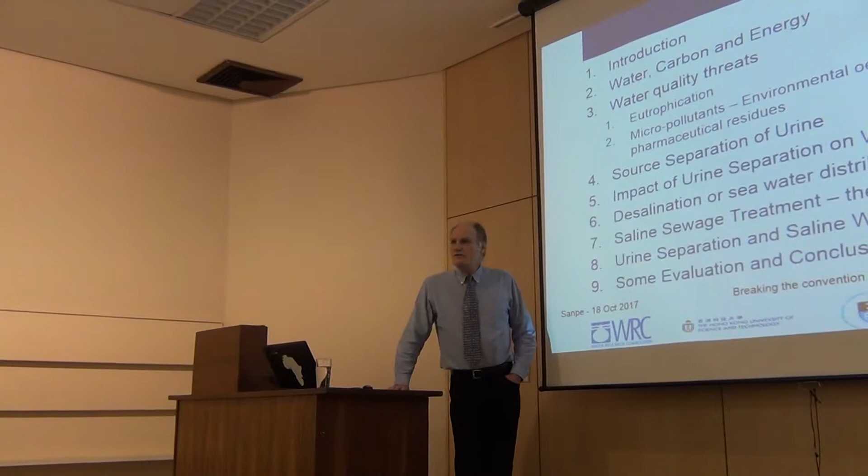So wastewater treatment started 100 years ago mainly to protect human health, and that's changed over the years. So now it's mostly about protecting the environment and human health, and that's basically broadly what I'm going to be talking about.

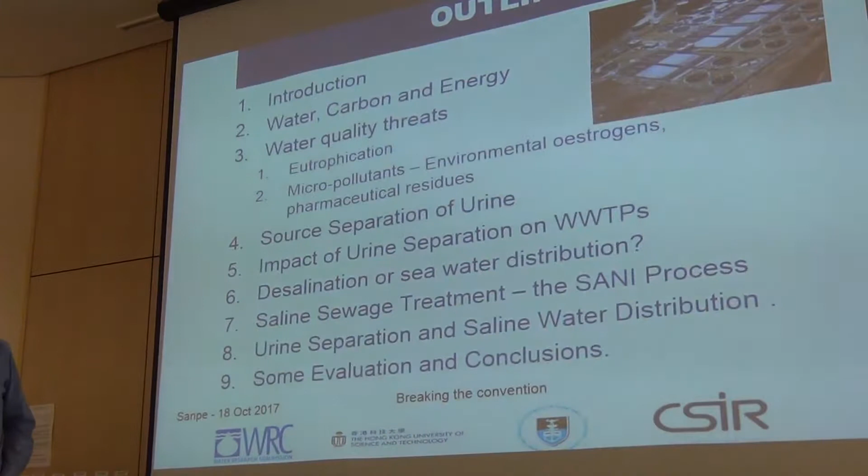So here is an outline: short introduction, the issues around water, carbon because of our climate change, and energy consumption, which of course has a lot to do with carbon, water quality threats, the eutrophication problem that we've had for many years in South Africa, an emerging problem, micropollutants, especially environmental estrogens, and then pharmaceutical residues.

I'm going to be talking about urine separation and how that changes the characteristics of wastewater and simplifies wastewater treatment. If we did manage to do urine separation, how would that impact our current infrastructure of sewage treatment plants? Then should we be doing desalination or seawater distribution? I'm going to throw out some ideas about that.

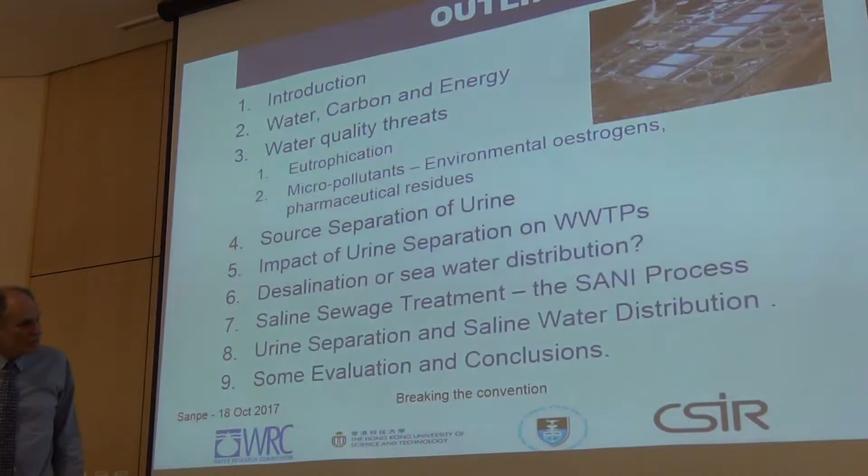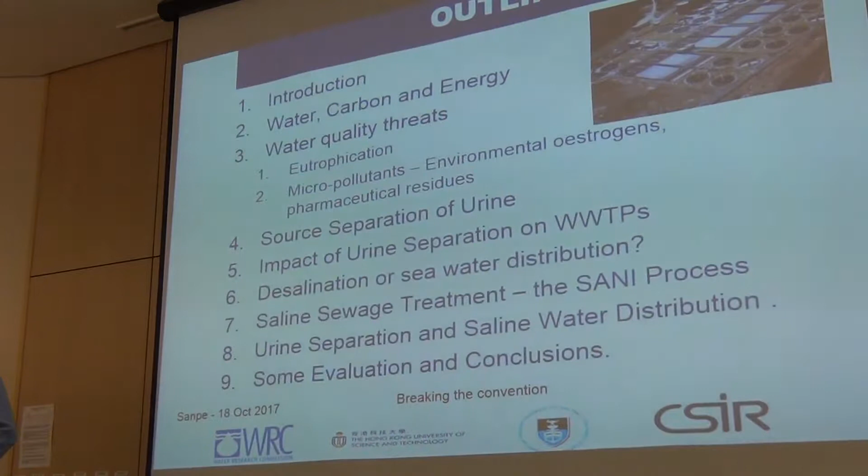Issues around saline sewage treatment, if we were to flush toilets with seawater, and the consequences of that. Urine separation and saline water distribution, and then some evaluation and conclusions. This is ongoing work, so we don't have all the answers yet, but there are some ideas here that are finding purchase in Hong Kong, which is setting itself up as a kind of a city of the future in

Asia. Alright, so wastewater treatment originated at the end of the 19th century to reduce waterborne diseases. We all know what London was like at around 1860, 1870. Cholera and dysentery were rife, people were dying of typhoid. But over the 100 years or so, we now treat wastewater to protect the environment as well as human health.

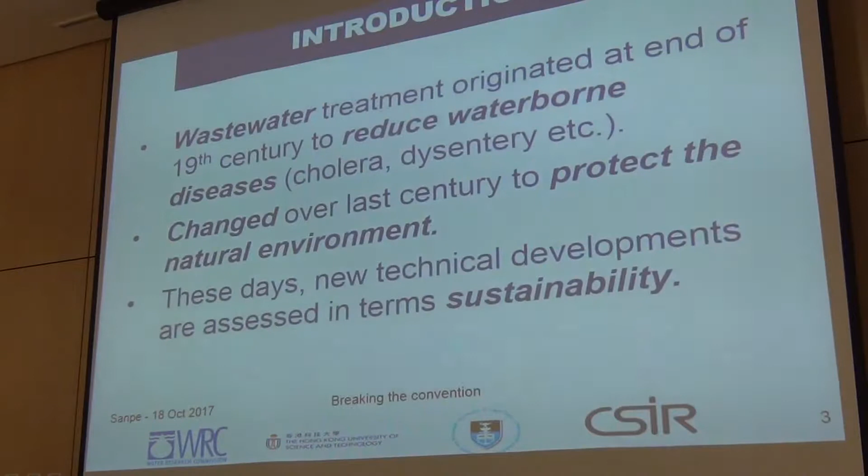But a third dimension has been added, and that's this word sustainability. So we want to try and do this wastewater treatment by consuming as few resources as possible, like energy, and emit as little carbon as possible, nitrous oxide and these other strong greenhouse gases, as few of those as possible. Sustainability, what does it mean?

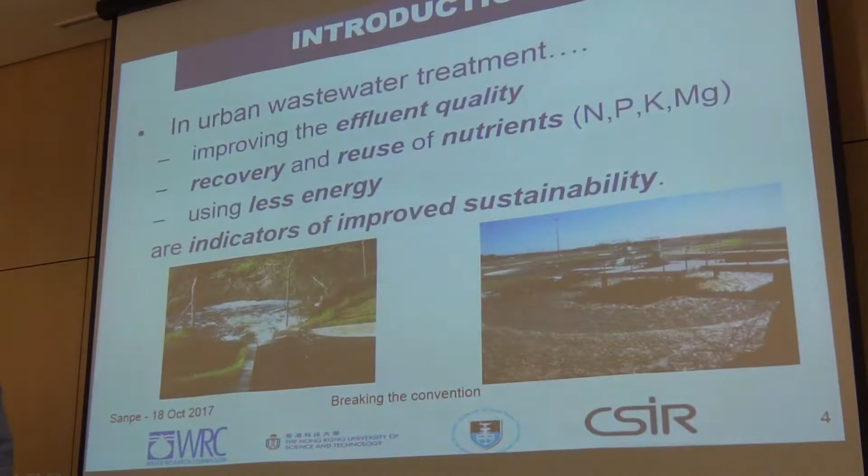I'm going to interpret it as meaning that we're improving the effluent quality of the water, the product that the sewage treatment plant is producing. We're going to recover and reuse some of the nutrients, in particular phosphorus, potassium, and magnesium. And we're going to do all this hopefully using less energy, which has to be brought in from outside. And these we will use as indicators of improved sustainability. I have no other way of knowing how to define it.

Now, the issue of energy in wastewater treatment is a controversial one, and these two authors from Vienna Institute of Technology, Svardal and Kroiss, stated it very succinctly. They say the energy that's available in the wastewater itself, that is the temperature of the water and the organics that we or industry emit into the water, is only some 0.02 kilowatts per person. That's 20 watts per person. That's the maximum that you can extract.

But the total power consumption that each of us has, connected to the grid, is in the order of 5 to 10 kilowatts per person. And that's not just what your meter reads at your house, that's the factories that make the clothes and everything, food production. And it's not a difficult number to get to, because we know how much Eskom produces, and you just divide it by the population of South Africa and you get the power consumption per person.

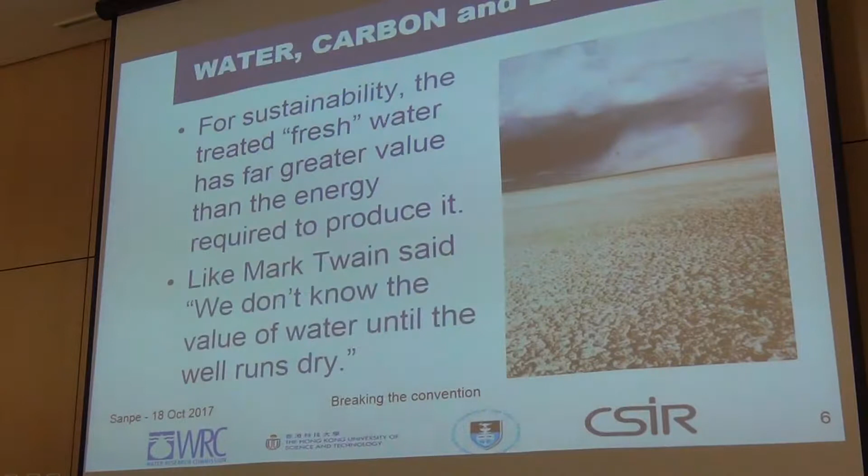So recovering energy from wastewater is never going to solve the energy problem. That's the bottom line. The water that is produced by the wastewater treatment plant is far more valuable than the energy or the carbon and nitrous oxides that we might produce in the process of recovering that water. So for sustainability, the treated fresh water has far greater value than the energy required to produce it. Like Mark Twain said, and we're beginning to discover in Cape Town, we don't know the value of water until the well runs dry. Our well is running dry.

Now, one of the greenhouse gases emitted by wastewater treatment plants, not the only one and not the worst one, is carbon dioxide. I just want to put it into perspective so that you understand the quantity of energy used in wastewater treatment by referring it to the amount of carbon produced. Every person connected to a sewage treatment plant results in about 20 grams of carbon as carbon dioxide being emitted from the plant. This is 50% of the CO2 that would be produced by the coal burning power station to generate the electricity used in treating that water. So the carbon from the organics is only half of the carbon generated at the power station for the electricity consumed at the treatment plant.

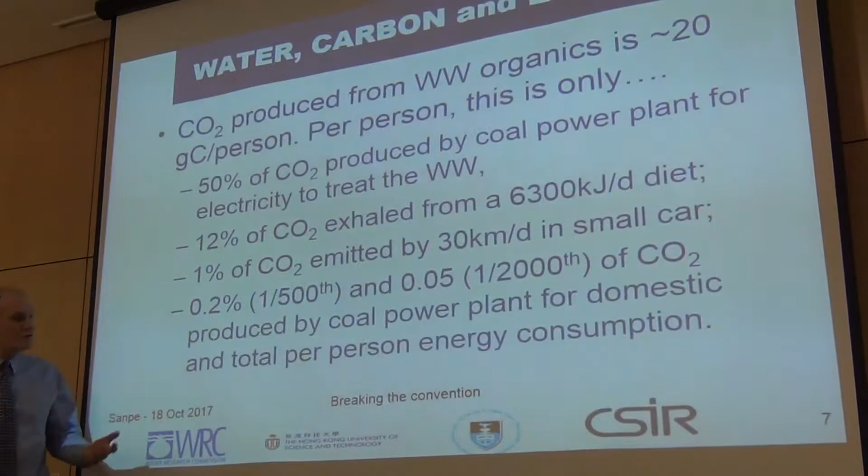And if we go down to how much energy we consume in a domestic situation and in total, we can see these percentages get very tiny: 0.2% and 0.05%, 1/2000th. So the energy and carbon at the wastewater treatment plant is actually not the issue. If we want to look after the planet, there are other places we need to go to address the problem. We don't have to go to the treatment plant. The water is more valuable.

Now, I'm not saying that we must be profligate in consumption of energy at a sewage treatment plant. No, minimizing the energy requirements of wastewater treatment plants is good. But the priority is far lower than human and environmental health, which are both closely related to surface water quality and quantity. So human and environmental health requires fresh water quality and quantity conservation. We therefore have to reduce eutrophication and salination. Salination means the acid mine drainage that's discharging into rivers from spent mines or even operating mines.

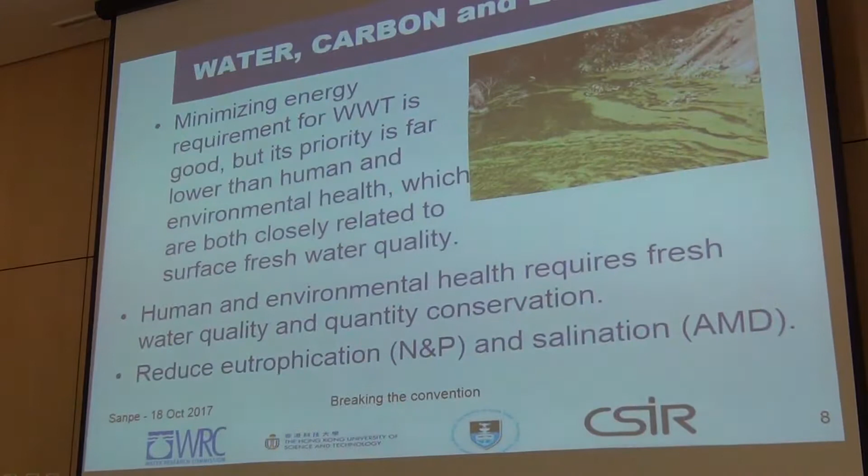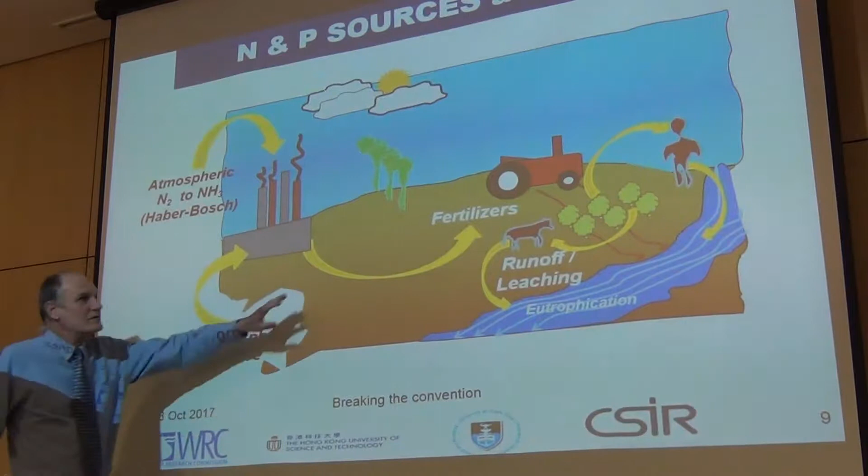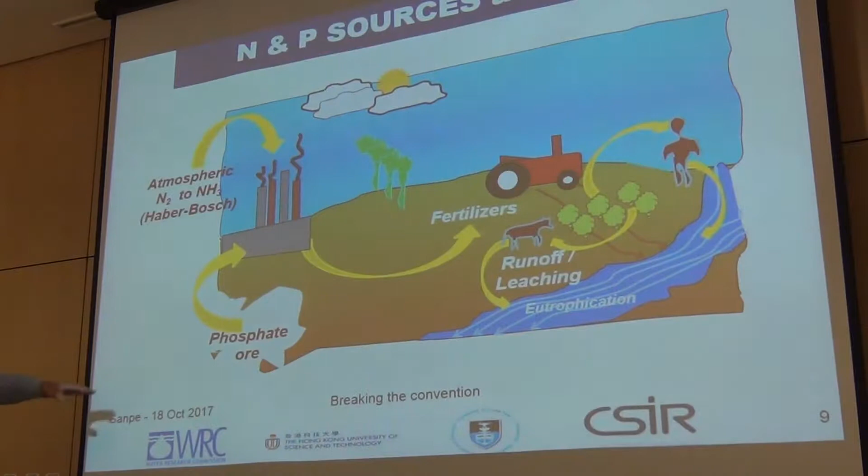Also, phosphate is mined, and it is a limited resource. There are predictions that we might run out by 2050, and where we're going to get phosphorus from then, we don't know, but agriculture needs it.

So phosphorus recovery becomes an important issue. So technologies have been developed to remove biologically nitrogen and phosphorus. We've played a fairly prominent role in South Africa internationally in achieving that through courageous municipalities and inventive universities.

And also sulfate from acid mine drainage is receiving increasing attention. So this is the sort of brown water that you see that decants in low areas from mining areas. Witwatersrand below the city is like Swiss cheese. You can't tell whose mine water is decanting where. It moves from the east and decants in the west because that's the lowest part of the Swiss cheese. And no one can accept responsibility for it because no one knows whose it is.

And yeah, it becomes an issue of what I call privatizing the gains and socializing the losses. The miners have been there and they've made their profits, and now your and my taxes have to go in there and pay for getting it fixed up.

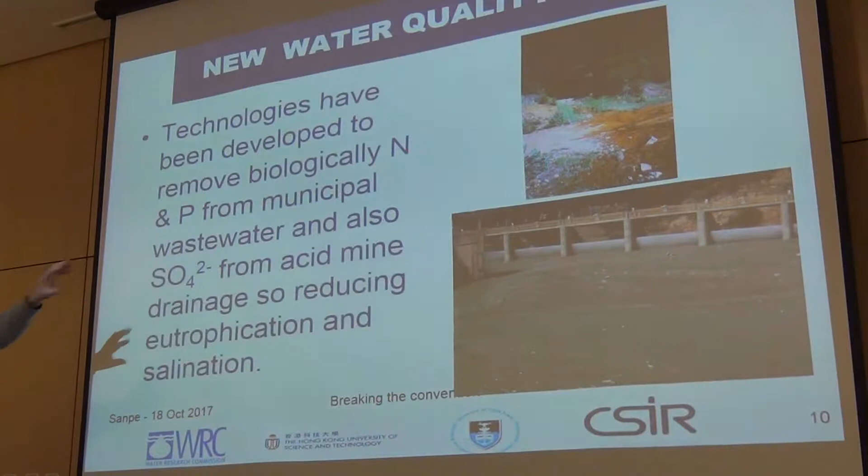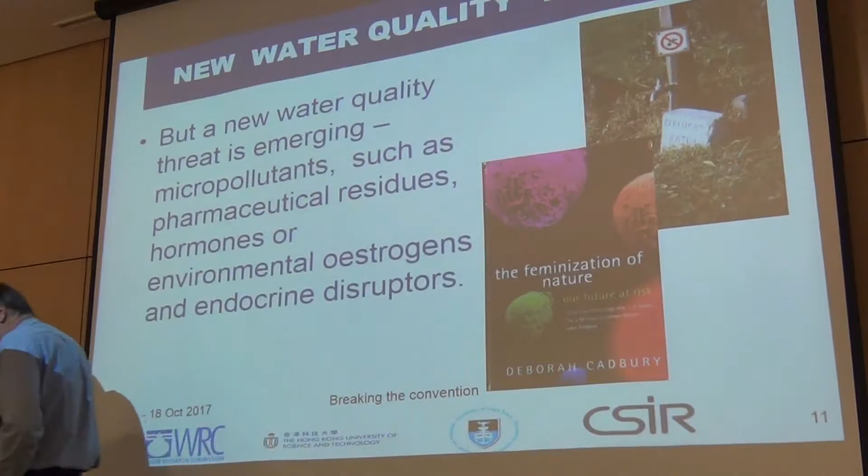Okay, so this is an issue that we're facing here in South Africa. But there is another very important issue that's emerging, and this is the one of the micropollutants. There was a fascinating book that was written in 1998. It's nearly 20 years old. Deborah Cadbury spoke of the feminization of nature, where environmental estrogens and endocrine disruptors, which come from medical residues, are changing the gender of

crocodiles, for example. Now, when crocodiles lay a nest of eggs, the temperature of incubation dictates the gender of the crocodile. So if a leguan or something wants eggs for breakfast, digs out the crocodile eggs and eats the top ones, they're the males. The females stay in the bottom of the nest where it's colder.

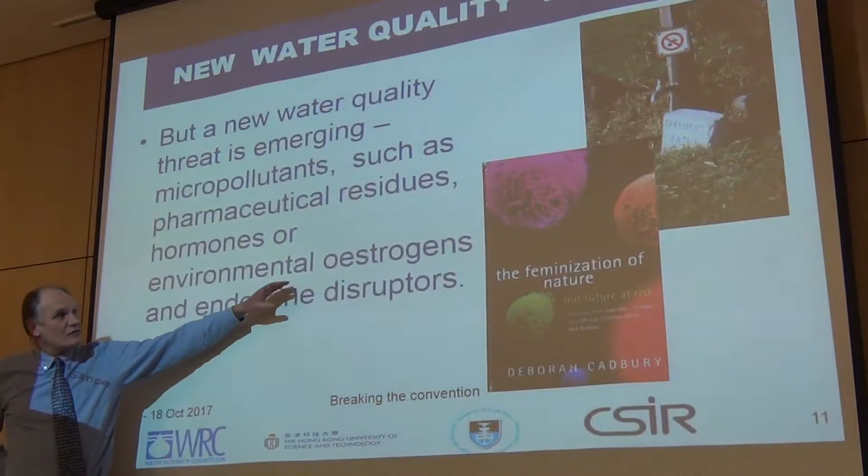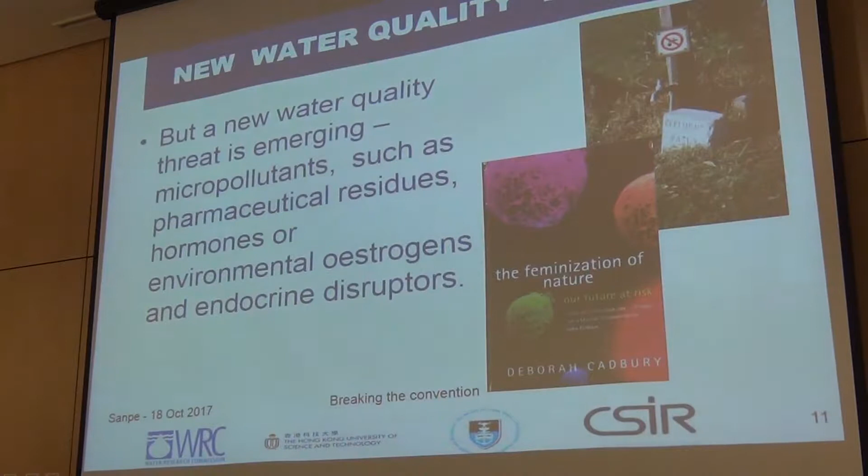They have done work on, and she describes these things, turtles, crocodiles, where they paint these endocrine disruptors that are detectable in the environment in and around the eggs, and they all hatch female. Trout hatcheries above and below sewage treatment plants: all the trout that hatch above the discharge of the sewage treatment plant effluent in the river are a mixture of males and females. Downstream are all females. This is a serious issue that we need to address.

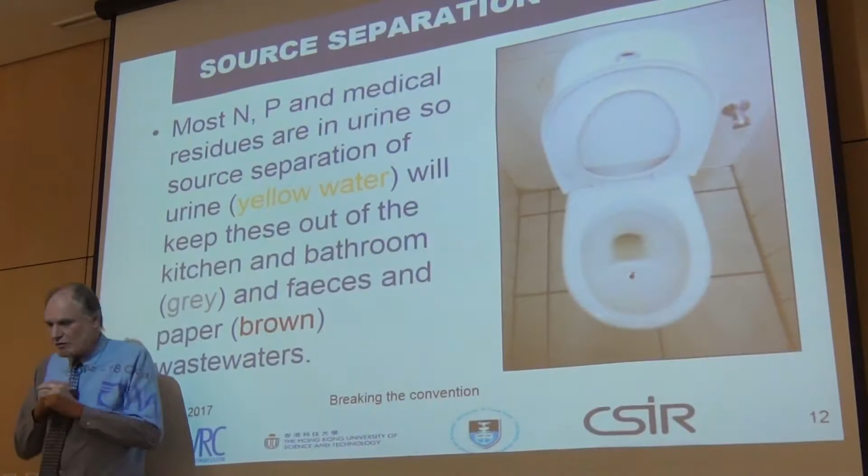One of the issues that can address this is urine separation. And there's quite a lot of research out there which shows that many of these endocrine disruptors and environmental estrogens are emitted via the urine. At least 2/3 of them come out the urine. The other third or so, depending on the type of medication, come out via the feces.

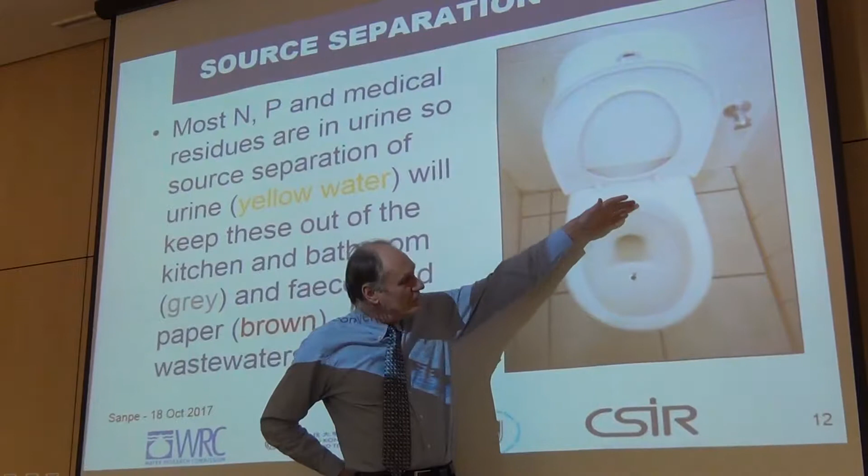So if we installed urine separation toilets, I think many of you would probably have seen them, it's got a little bowl in the front for urine and the feces go into the back. And the two streams are kept separate. If we did that, then everything that's contained in the yellow water will not be part of what we then would call the brown water. And that makes a significant difference. And the differences are as follows.

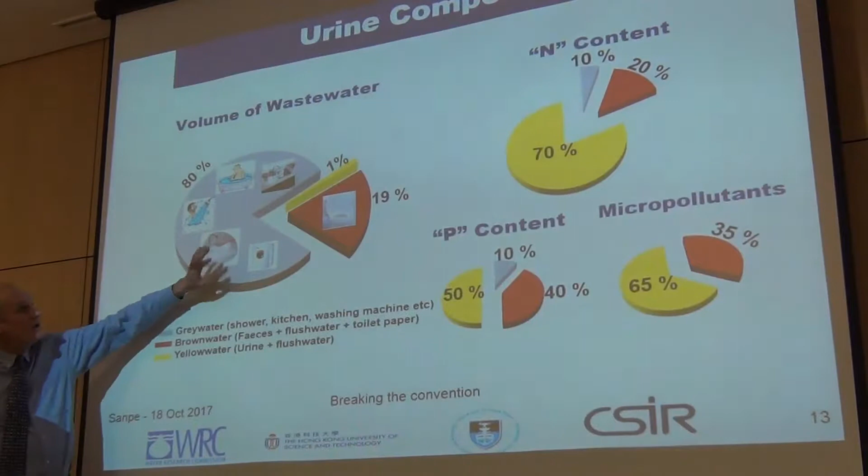So with regard to the volume of the water, this is grey water, and the red is brown water, the feces from toilet flushing, and yellow is the actual urine volume with a small amount of flushing volume. So you can see that the volume of urine that you would collect is very little. It's only 1% of the total water that would be produced.

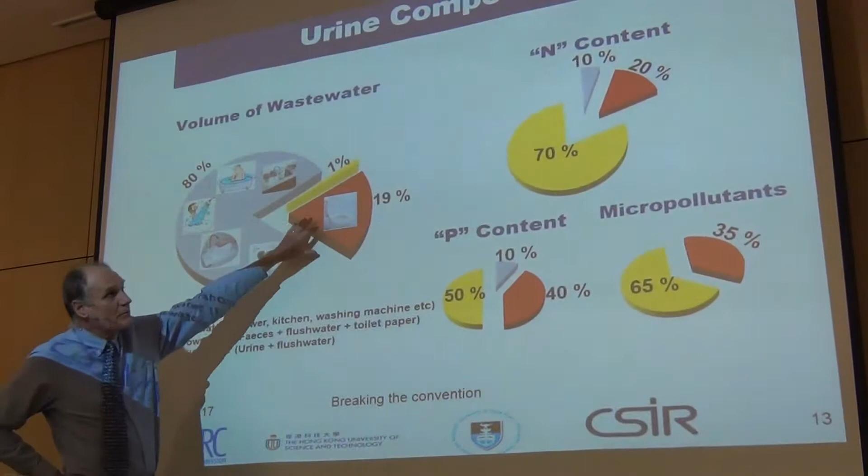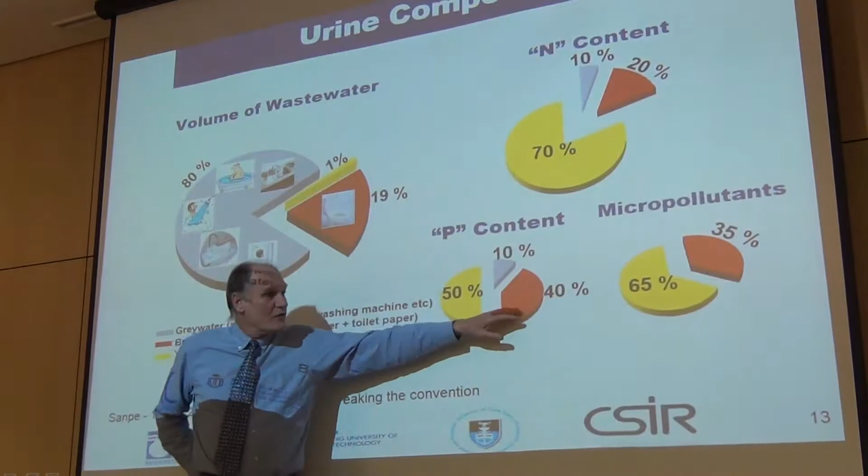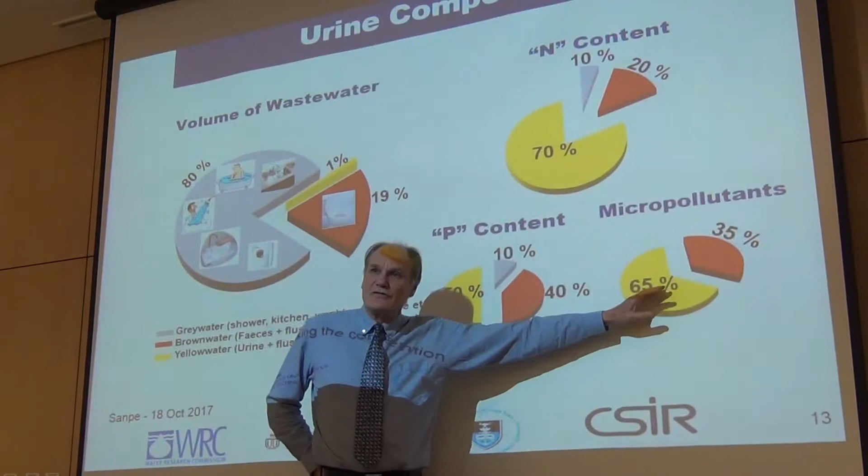But look what it does to the nitrogen content. The urine, the yellow water, contains 70% of the nitrogen, which would then not get mixed into the larger volume of water. And the brown water only contains 20%, and the grey water 10% of the nitrogen. With the phosphorus, 50% is in urine, 40% in the feces stream, and 10% in the grey water, that's shower and bath, kitchen and so on. And micropollutants is about 2/3 in the urine and the other 1/3 in the feces stream.

So keeping the urine separate allows you to do focused treatment on the nitrogen and phosphorus, get the nutrients out of the urine, treat the micropollutants in the urine, and then discharge it to sewer afterwards. But I'll discuss all that further in this particular talk.

If questions come up as I'm speaking, please ask them, because I think that's quite an interesting engagement we could have. It'll take us a little longer to get to the end, but I do want to provoke some discussion. Students used to say, listening to me is like trying to drink water from a fire hydrant.

So recovery of the nutrients such as magnesium, phosphorus, and nitrogen as struvite, that is a particular mineral that we can make, would help us in mineral recovery, phosphorus recovery in particular. Reduction of the nitrogen and phosphorus loads on wastewater treatment plants would be a consequence of doing urine separation. And then reduction in the micropollutants, especially these pharmaceutical residues in our over-medicated society.

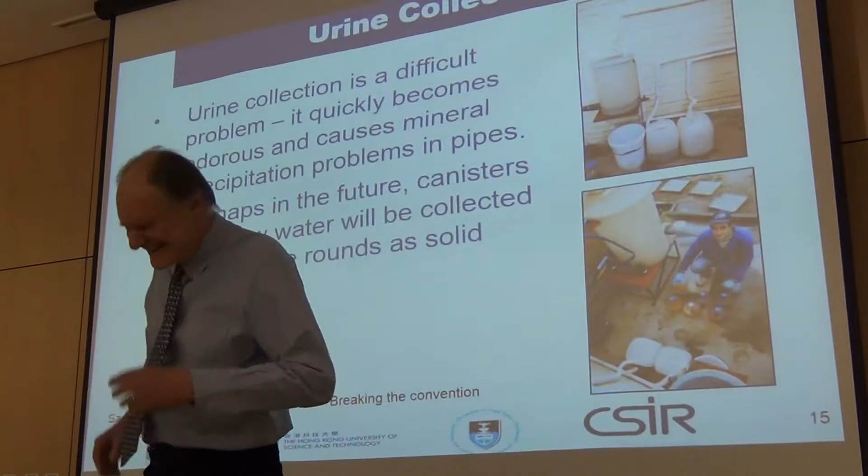There was such a funny story on Cape Talk Radio the other day. I can't help telling you. So this woman phones up Cape Talk Radio. I think she was talking to Africa Melane, and he asked the question, what's the protocol if people come to your house and visit? Do you ask them to flush the toilet, or do you say, use the bucket next to the toilet? The lady phones up and she says she found someone that used it, done number 2 in the bucket. The radio station laughed for about half an hour.

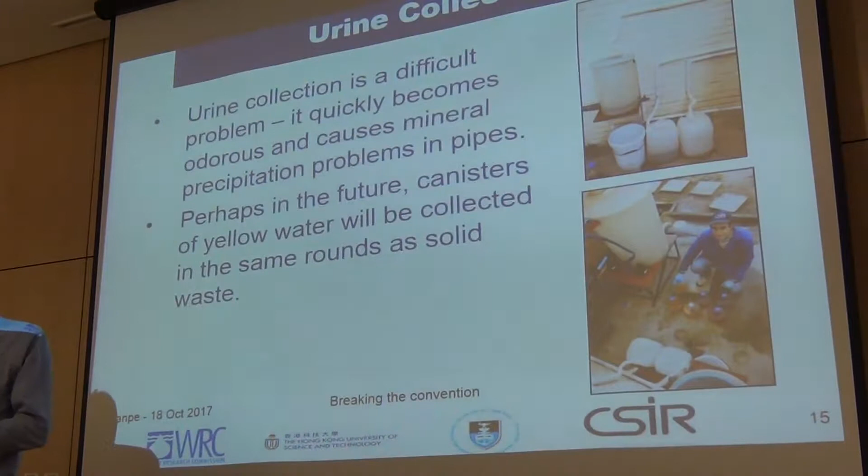Anyway, so those are issues that we're facing with urine separation, because in urine, to stop us from getting kidney stones, we excrete urea, and that quickly hydrolyzes and becomes ammonia, raises the pH, and then you get precipitation of minerals. And these would clog up pipes if we were to collect the urine in pipes by itself.

So perhaps in future we would be embracing our environmental footprint, and together with our solid waste bins, put out canisters with a yellow fluid in it for collection. Who knows how this might go. But whatever we do from the present situation is going to be less comfortable than our current system. But the current comfortable system consumes too much water.

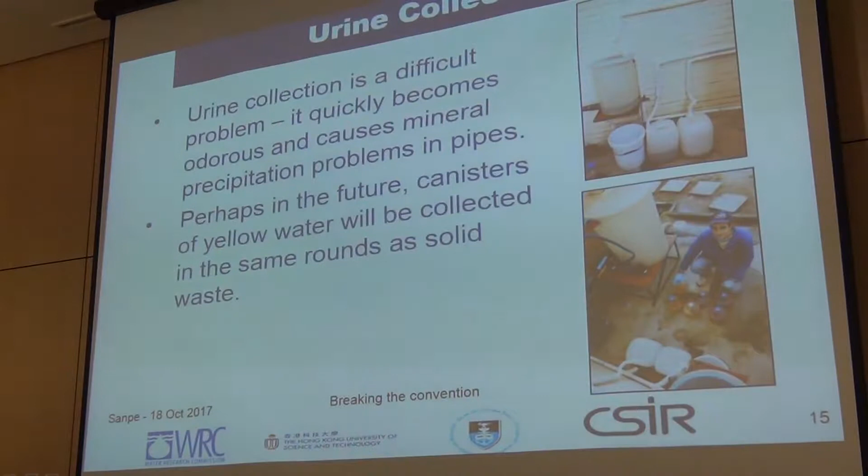And so technically, I think we can do it. We have to change the thinking within our culture and our society on how we can use less water. And the drought is teaching us a lot of things. So the impact of urine separation on wastewater treatment plants: well, it would reduce the nitrogen and phosphorus loads. It would make biological nitrogen and phosphorus removal a lot easier at the sewage treatment plants.

In fact, we estimate that it would increase the existing capacity of this infrastructure by some 100%. We could treat double the amount of wastewater in these facilities if we didn't have the urine to deal with. Because the urine is about nitrogen removal, and nitrogen removal requires us sustaining the slowest growing bacteria, the nitrifiers, in our sewage treatment plants. And if we don't have to do nitrification anymore, we only have to run a sewage treatment plant to keep the next slowest, and those are the phosphorus removal bacteria. So it will unlock huge capacity in our sewage treatment plants.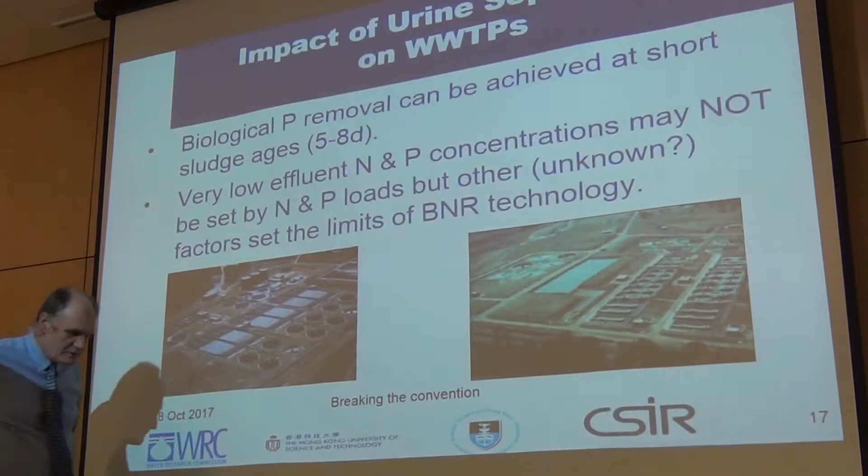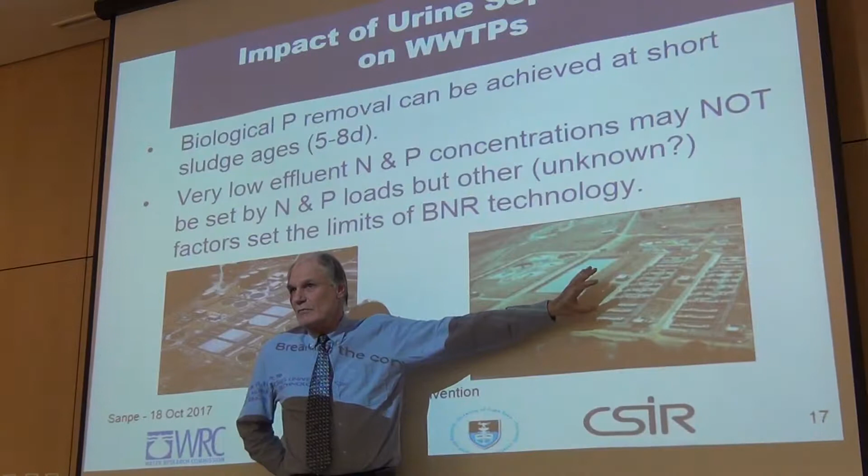It was the first custom-built wastewater treatment plant. The city engineer at the time was Eric Hall, and based on some scanty experimental work we did at UCT and pilot plant work by the CSIR at Daspoort, they hurriedly retrofitted this plant to introduce biological phosphorus removal, and so that was the first generation of such a plant. I think it was built in 1975.

Several water-stressed cities like Cape Town, Port Elizabeth, are considering desalination to augment dwindling freshwater supplies. But desalination is energy intensive and financially expensive. And I'm sure once the dams are full again, and that may happen, but we're not sure, they'll just switch off the desalination plant.

And then we have several, I don't know, how much does a desalination plant cost that delivers 50 megaliters a day, that's the plan, right? I don't know, a couple of 100 million, right? And then to switch it off is... I think it makes more sense to do something that you can use all the time, because then you're getting value for money.

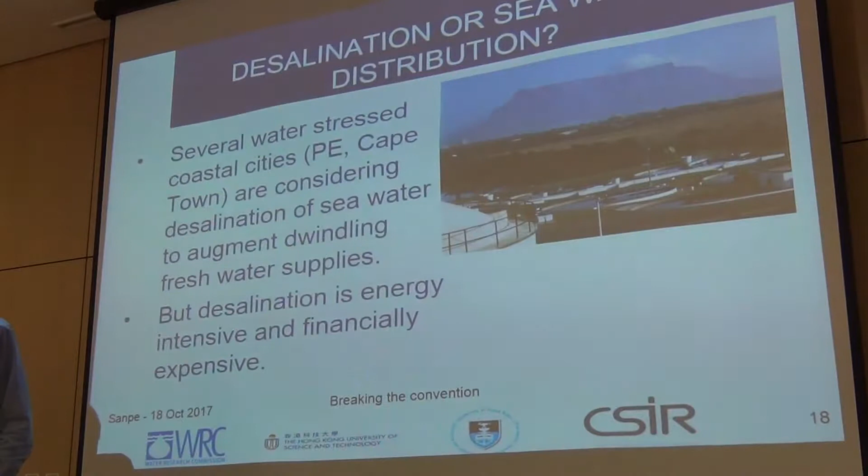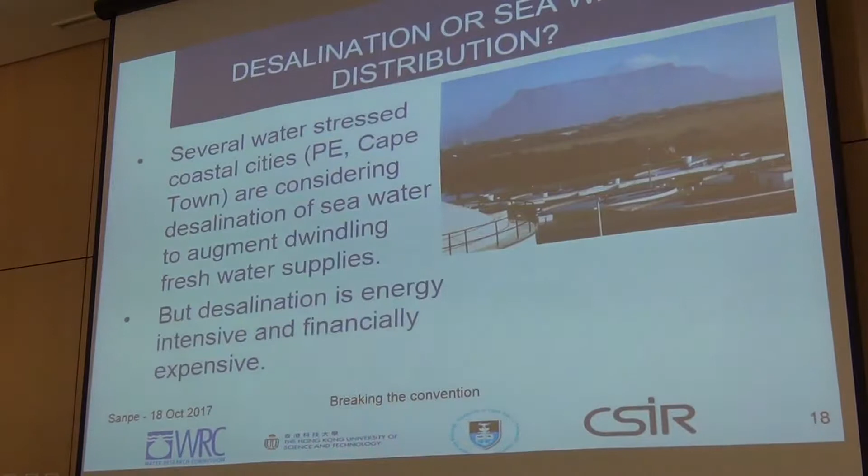I remember one of my friends in engineering said, any technology that works is cheap. Technology that's not working is very expensive no matter what you pay for it. And I think desalination could be one of those technologies. To distribute desalinated seawater so that upper income people can water their gardens, I think is environmentally indefensible. And we are heading that way.

Rather distribute seawater for toilet flushing, save freshwater consumption, and while you're digging up the pavements, replace the broken pipes and save more water, because now we're reducing the leaks. And don't tell me that, oh, it's too much trouble to dig up the pavements. I see Openserve digging up the pavements. So we'll do it for fibre, but we won't do it for water.

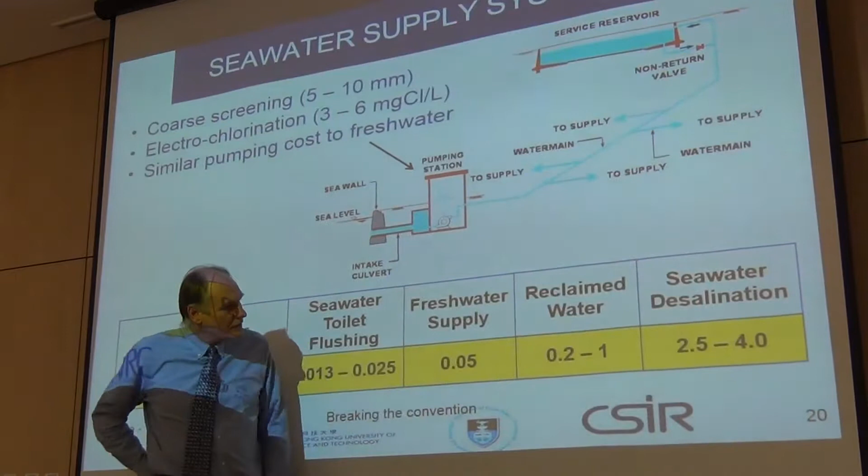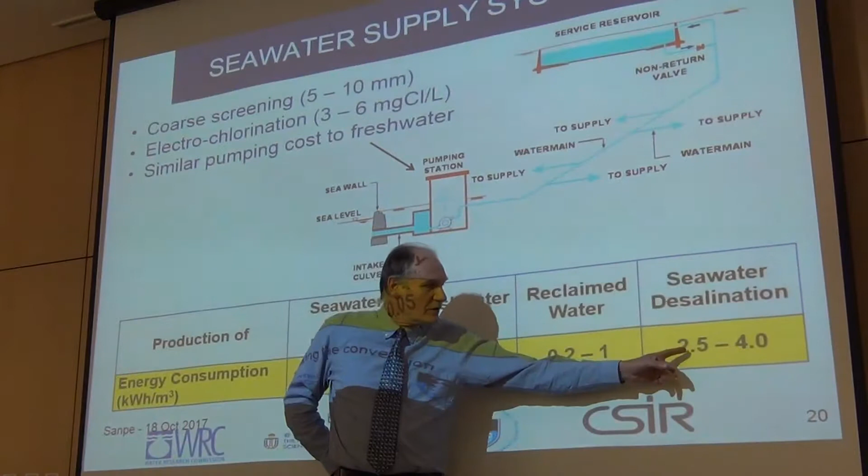Anyway, Hong Kong has been doing this since 1957. All water in Hong Kong has to be imported from the mainland. And here are some of the costs. Energy consumption for seawater toilet flushing, 13 to 25 watts. This is fresh water supply. They can do at 50 watts per kiloliter. Reclaimed water at 0.2 to 1 kilowatt per kiloliter, and desalination clearly is the most expensive way of trying to supply water.

So Hong Kong has a dual distribution system. They've got a potable water system and a seawater system in plastic pipes. 2 pipes go to every house. Plastic pipe brings seawater, you flush the toilet. I've not ever tasted it, but it's there. And potable water to the bath and the kitchen and for all the other water uses.

And people in Hong Kong use water at 300 liters per person per day. That's a very high water consumption. But I think it's because it's so hot that they take cold showers all the time. Otherwise, I wouldn't know why the water consumption is so high. This saves 1/3 of the fresh water.

Fresh water they can distribute at 5 Hong Kong dollars per kiloliter, whereas seawater only costs them 1 Hong Kong dollar. This is about 1.5 rands per Hong Kong dollar. So here we're talking about 7.5 rands per kiloliter, and here we're talking about 1.5 rands per kiloliter.

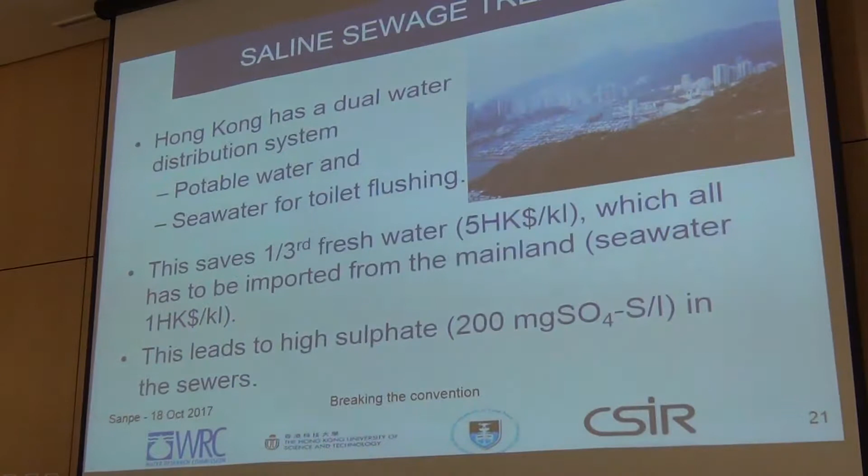But of course, this leads to the problem of sulfates in the sewage. And all cities would have sulfate limits to how much sulfate you can discharge to sewer in the industrial regulations. So of course, municipalities throw their hands up in horror when they say, Ekama, don't be nuts, you'll corrode our pipes in a matter of a year, maybe 2 years.

So what happens here is called crown corrosion. So because of the sulfate that's sitting in the liquid fraction of the water, the sulfate reduction bacteria change the sulfate to sulfide gas. That gas escapes into the headspace of the sewer, but there's always a condensate layer up in the top of the sewer.

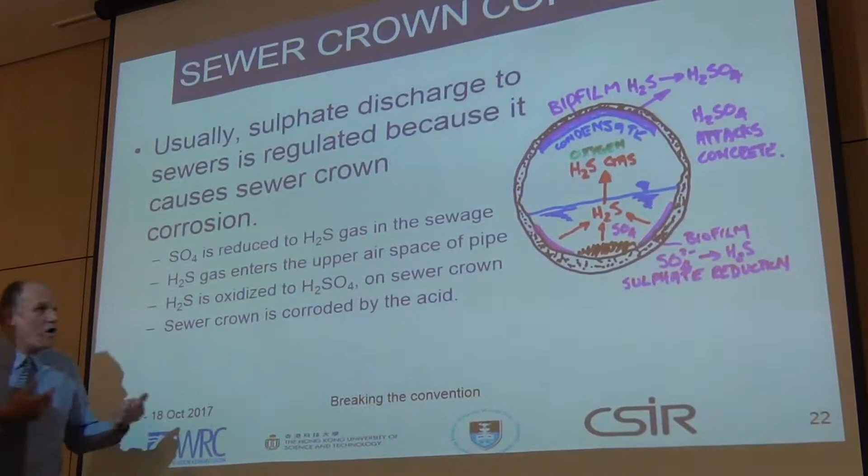That sulfide gas dissolves into the condensate, and there you get bacteria that do the opposite of what you do in the water. These bacteria will convert the sulfide back into sulfate, and that produces the sulfuric acid that just chews the crown of the sewer, and of course we have sewer collapses. And we want to avoid that because sewers are expensive.

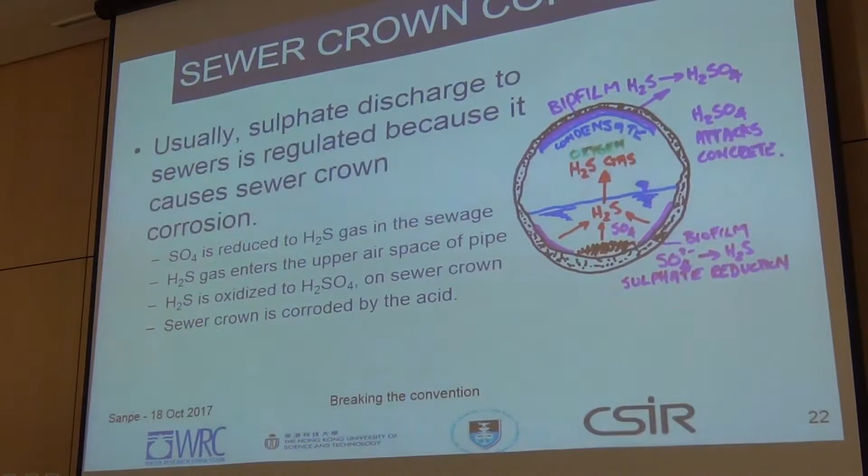Here's one from, I believe, Virginia in South Africa, the sewer, where acid mine drainage leaked into the sewer, and of course you have the whole process from the sulfate of the acid mine drainage, and they lost 20 to 30 millimeters in the headspace over here, nearly 64 millimeters of pipe thickness over a period of, I don't know, a few years.

So it's definitely not a good idea to have sulfates in the sewer. But in Hong Kong, it was for them cheaper to fix the sewers than to buy more fresh water.

And as for the biological nitrogen and phosphorus removal that we developed here in South Africa, necessity is the mother of wisdom. It's amazing how that works. And in Hong Kong, they've now developed the SANI system, as they call it, which allows them to deal with the sulfate in the seawater, and it goes paired with urine separation. And I'm going to elaborate a little bit more on that now.

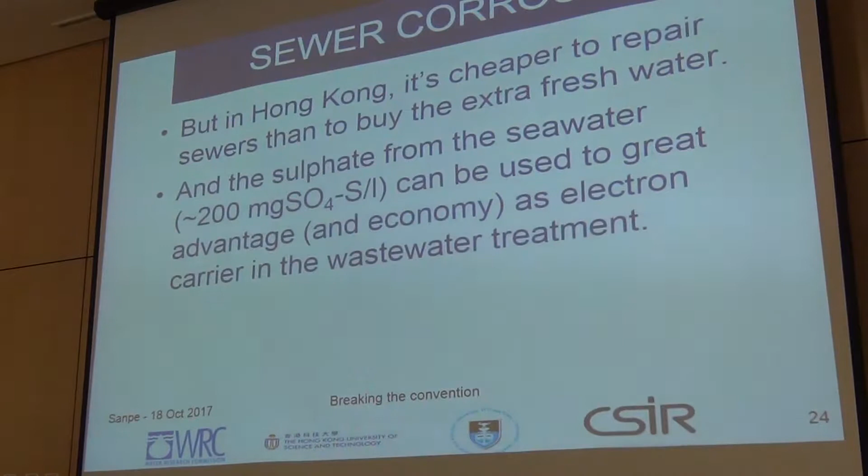I don't know why it's going.

So, what we normally do conceptually in conventional wastewater treatment plants is that we have organic material from feces. These organic materials, the technical term we call it, it's an electron donor. It's compounds that can donate electrons to which is bound energy that the bacteria are really after.

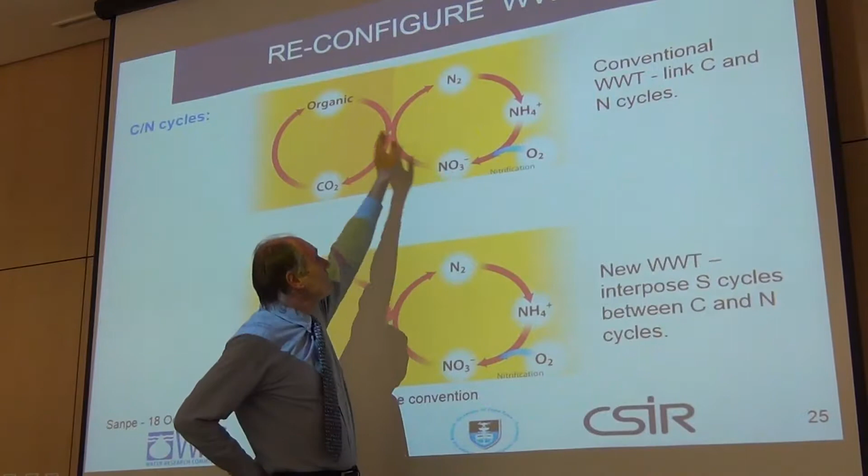And then we connect up the nitrogen removal step. So here is the ammonia that we have in wastewater from urine. We put oxygen into it, and then we produce nitrate through this nitrification step, as it's called. And then we use organic material to change the nitrate into nitrogen gas. And the nitrogen gas escapes into the atmosphere just for the Haber Bosch to pull it out of the atmosphere again and make more fertilizers. But that's the cycle that we're in at the moment.

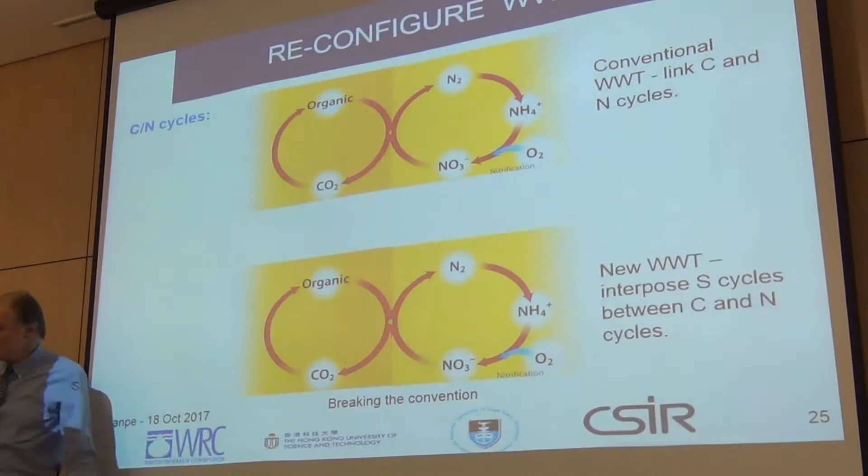So the organic material, the carbon and the nitrogen system are locked together. We use both to do the nitrogen removal. The phosphorus removal is a little bit more technical, but I don't want to get into that. What happens in the SANI system is that here again we have the same as the drawing above, but we interpose the sulfur system in between. And that is shown here.

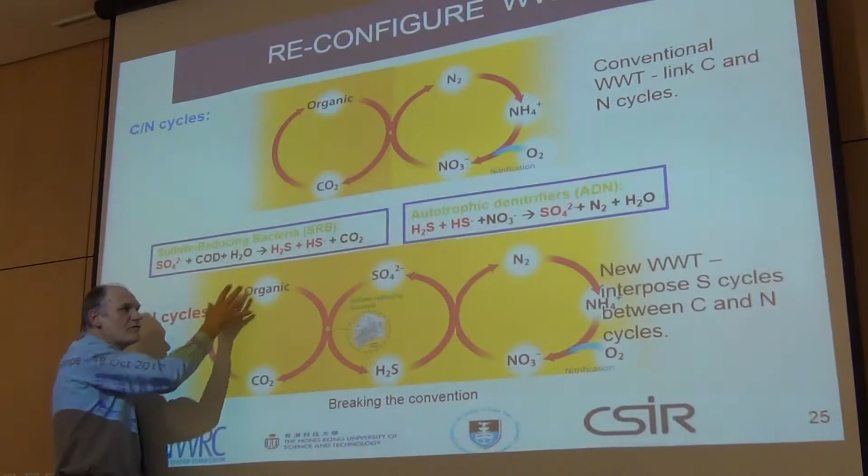So now we have the organic material, but because we've got sulfate in the seawater, we can transfer the electrons from the organic material, producing carbon dioxide in the process, to sulfate, which is an electron acceptor. So the electrons go from the organic to the sulfate. The sulfate becomes sulfide when it takes up the electrons from the organic material.

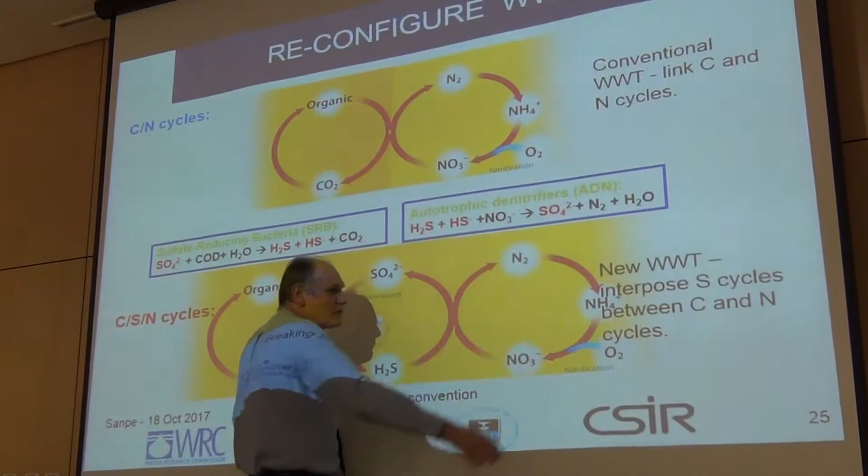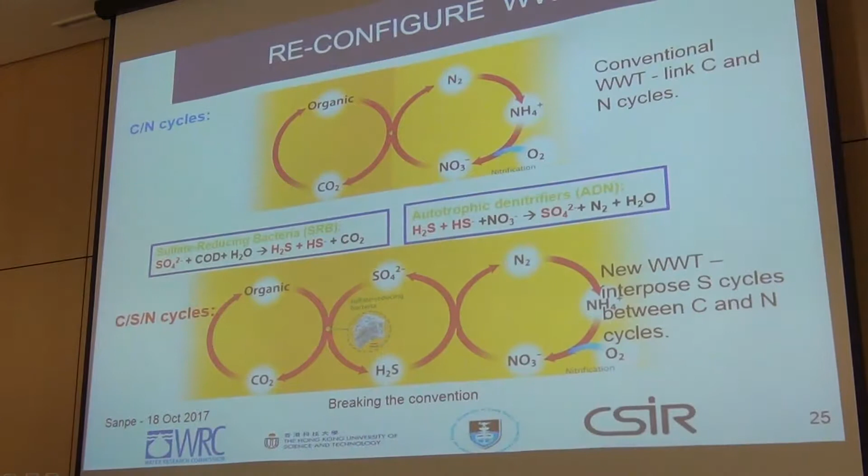And then we use the sulfide in the nitrogen removal process, where we again have nitrification in this first step, produce the nitrate, same organisms. But now we use the electrons in the sulfide rather than in the organics to change the nitrate to nitrogen gas. And that's a process on which this SANI process is based.

So this process of converting the organic material is now an anaerobic process, not an aerobic process. That means much less energy, because we're not converting the organics with oxygen as we're doing in the current system. So out the top of this anaerobic reactor, we would have high sulfide and high ammonia, and we go into this packed bed reactor, which is like a media on which specific bacteria grow.

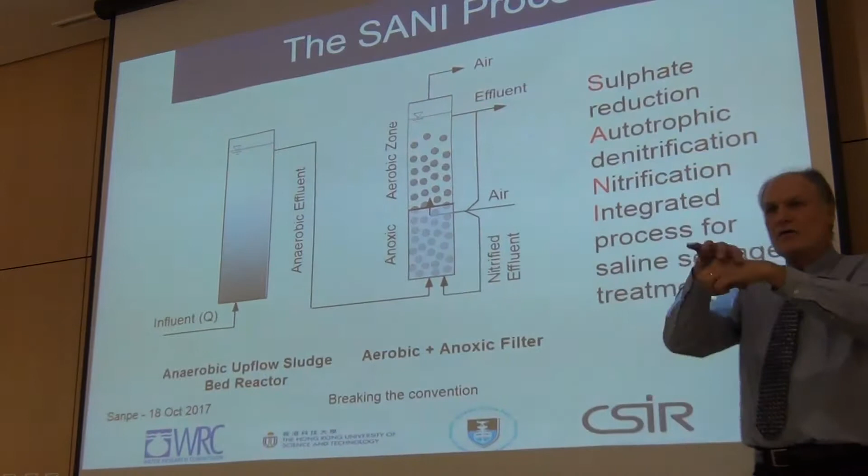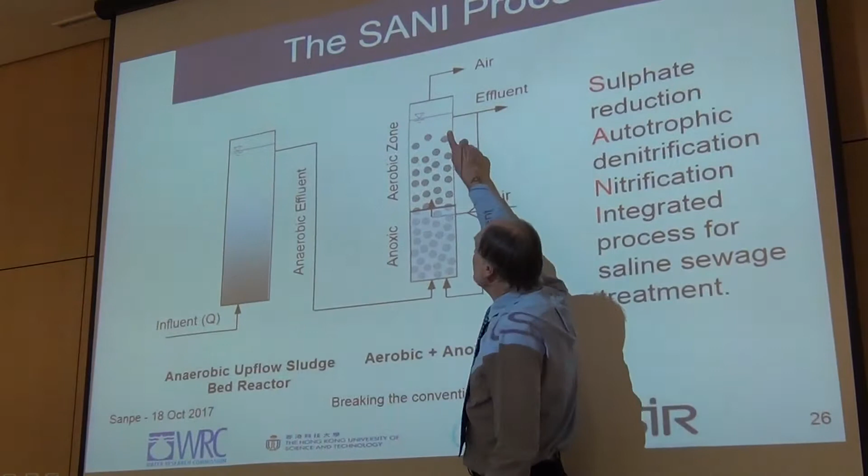In the bottom half, it's no oxygen. In the top half, we have oxygen. And so we take a recycle from the top, where the ammonia is converted to nitrate. We take the nitrate-rich liquid and put it into the bottom. So here comes the sulfide and the nitrate, and here we have what is called autotrophic denitrification. And that changes the sulfide back to sulfate and the nitrate to nitrogen gas.

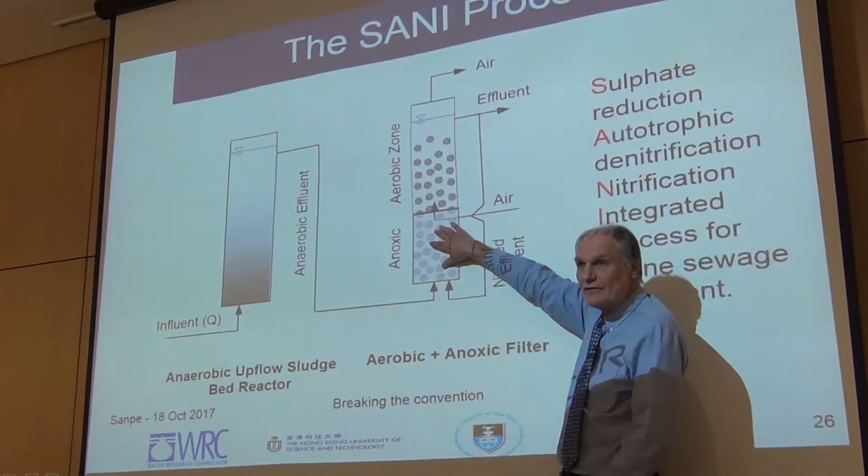And being autotrophic, the production of biomass is about 1/4 of the production of biomass in a heterotrophic denitrification. Which means we are doing two things here. A, we are not consuming oxygen here, and B, we are producing much less sludge, because this is an autotrophic process. And producing much less sludge makes a lot of saving on wastewater treatment as well.

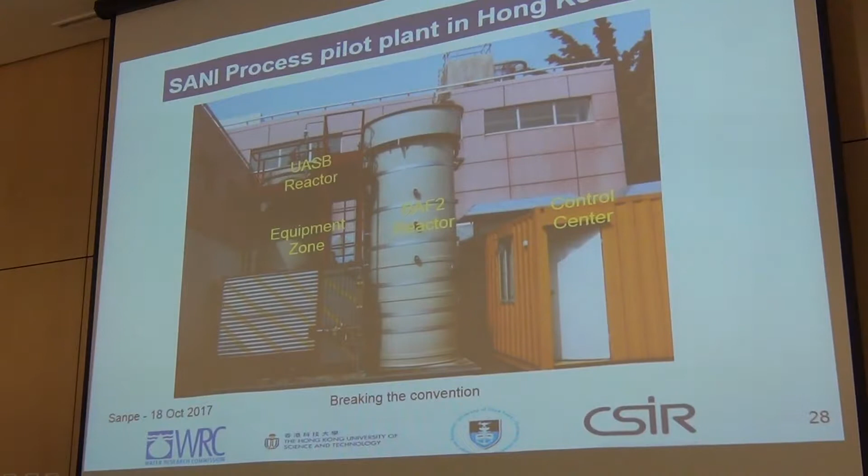Okay, so that's the SANI process. There's the pilot plant that I was involved in, and I'll describe in a moment how I got involved with their biological sulfate reduction work. This is the UASB reactor. That's the anaerobic reactor for converting the organics to sulfide. And these are these two reactors. One was an anoxic and the other one was the aerobic for the autotrophic nitrogen removal steps.

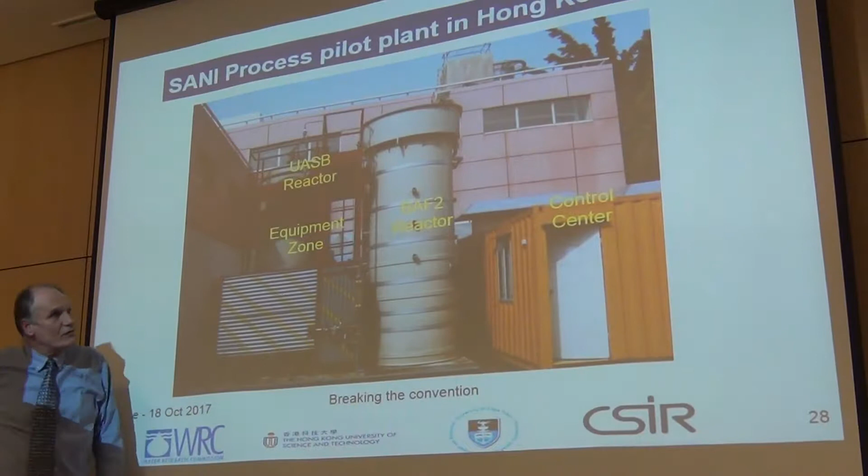So the reason we got involved there was quite fortuitous or accidental. I was on my way to South Korea for a book launch, the book that was published by the IWA, and they wanted the editors of the book to go there because the Korean power company sponsored the writing of this book, and they wanted the editors to sign at the book launch. So we went to do that, and I went on the way past Hong Kong.

And I had taught a course to the Hong Kong Drainage Board before, so when the professor at Hong Kong University of Science and Technology, this one here, heard I was coming through, he said, "Oh, won't you give a talk to my postgraduate students?"

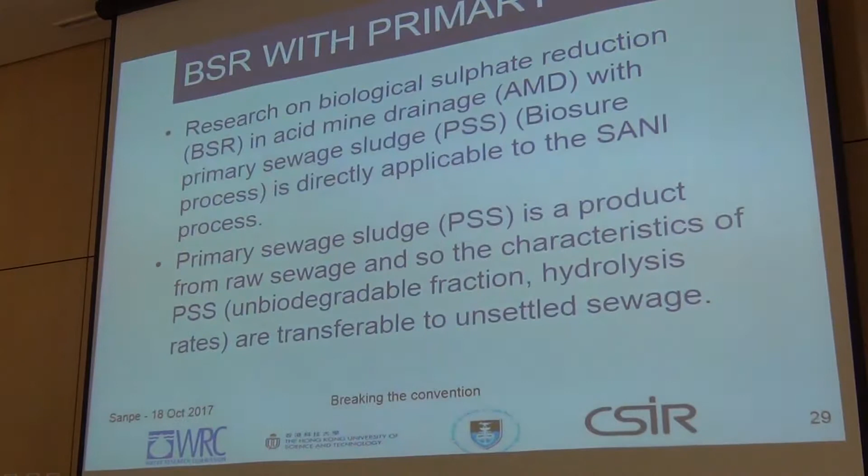I said, "Sure, what would you like me to talk about? I can talk about nitrogen removal, I can talk about biological sulfate reduction, I can talk about mineral precipitation." He said, "Yes, biological sulfate reduction." So I started telling him about the biological sulfate reduction work that we were doing for acid mine drainage treatment.

Acid mine drainage treatment is basically chemically based. You add lime, you precipitate gypsum, but you cannot get the concentration of the sulfate down below 2000 milligrams per liter in the precipitation step. And therefore you need some other secondary attached process to change the 2000 down below 250, which is the discharge standard for the sulfate. And that's where biological sulfate reduction begins to play a role.

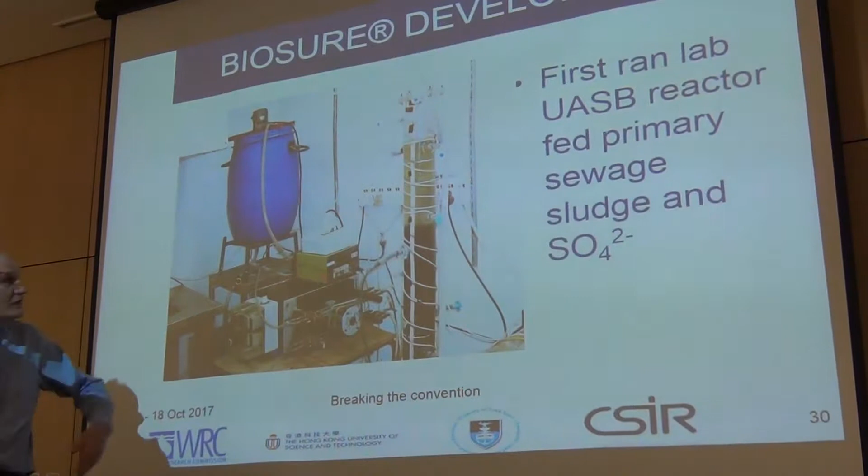Now, the cost of biological sulfate reduction is driven by the cost of the organic material you need to drive this removal process. And of course, sewage sludge is free. And at Erwat, there was the Grootvlei mine and the Ancor sewage works 2 kilometers apart. So they pumped the acid mine drainage to the Ancor works. We did the pilot plant work here in Cape Town. Erwat did some of the full-scale work on their reactors, and we basically validated that you could use sewage sludge for biological sulfate reduction.

And so there were a number of things that we found in this particular project, and the one interesting thing is that we found that the hydrolysis rate, which is the rate limiting step of using sewage sludge, was the same whether we had methanogenic conditions or sulfidogenic digestion conditions. And of course, methanogenic anaerobic digesters we're very familiar with in the South African context. Research work has been done for many decades on that.

Also, we found the same unbiodegradable fractions for aerobic activated sludge and anaerobic digester systems, which was interesting because it means that the aerobic bacteria that we have in our biological activated sludge reactors agree with the anaerobic digestion organisms that what's unbiodegradable for the one is also unbiodegradable for the other. They agree on that. That makes modeling of the systems easier.

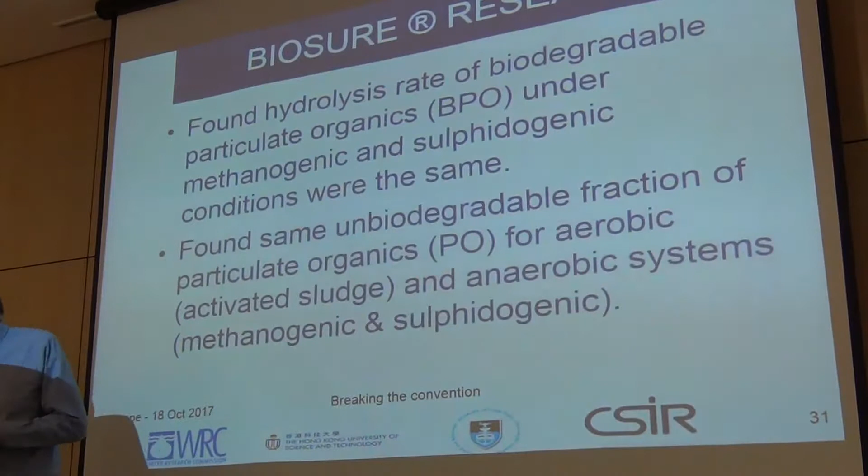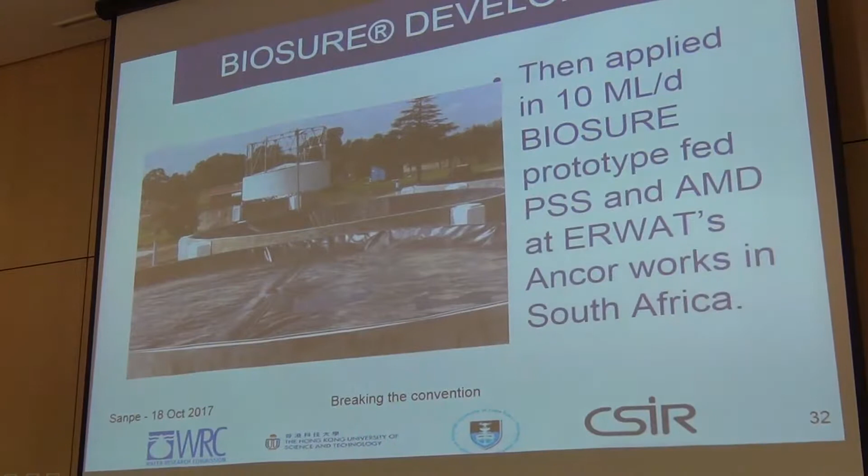So the ideas that we then proposed, models that we produced, etc., were applied in this 10 megaliter per day BioSure, as it was called, biological sulfate reduction, and Rhodes University was instrumental, together with us, in getting this process implemented together with Erwat at their Ancor sewage works. So they converted 2 of their old Dortmund tanks into these anaerobic digesters and basically validated the concept.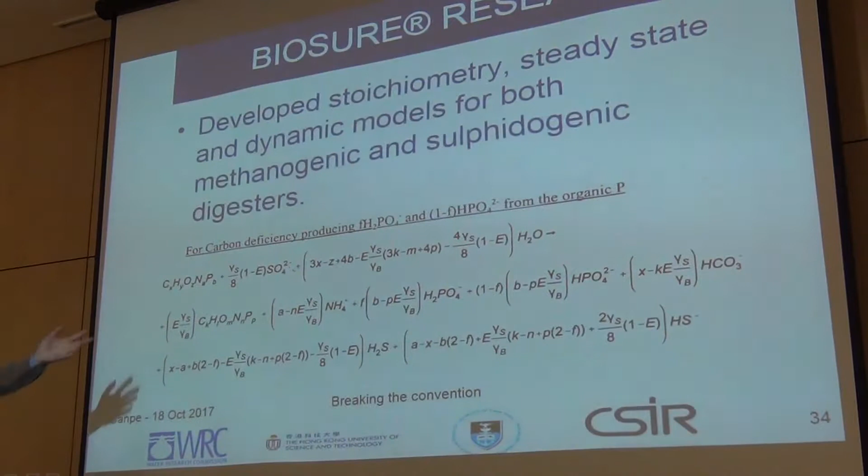Yeah, I think I can step over that, and I probably would best step over that as well, but those are just some of the theoretical ideas that go into these models that we produce. This is the sort of thing that the students are nice doing, but it's got to have some practical value. So fortunately it has in the end, but I won't spend too much time on that.

So seawater distribution. Coastal cities like Cape Town would then need to install a dual water distribution, potable in steel pipes, seawater in plastic pipes. Now, where dual water distribution systems have been placed, they generally have been low-grade water for flushing toilets and high-grade water for potable uses in the house. But mistakes happen, and plumbers sometimes cross-connect the pipes. And they've had serious problems, and in fact they've had diseases, sicknesses, and in some instances deaths in some of the towns where they tried low-grade reclaimed water distribution.

So over the years, the quality of the so-called low-grade water that is dually distributed has been ratcheted up, and it's now almost the same as potable water. For seawater, you don't have that problem. You can take the seawater, you filter it, and then you put a small electrical charge on it. It converts the chloride to chlorine and disinfects it. And every single user is a biosensor.

Why? If there's a cross connection, A, it's not going to make you sick because there are no diseases in the water, but it's going to taste awful because someone put the salt cellar over it. So you can phone up the city and say, I think there's a cross connection here because my water just tastes salty. And then the people come and check it out and fix it up. So it doesn't pose any risk for cross connections.

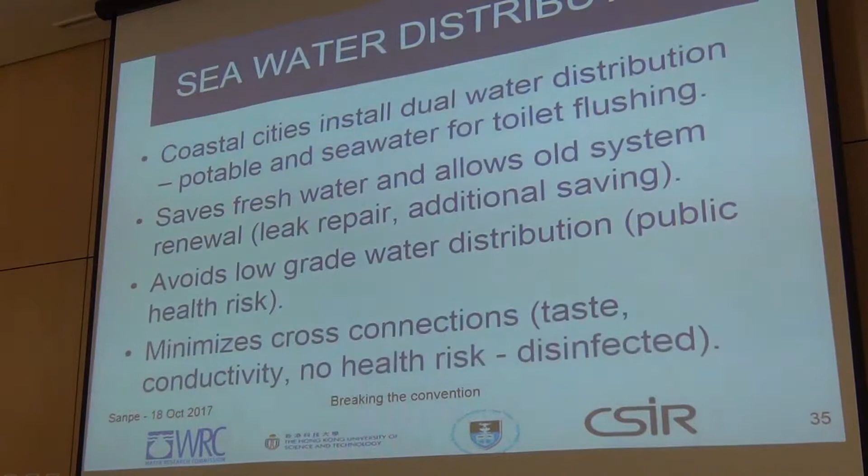So we save water because we're no longer flushing toilets with fresh water. It avoids low-grade water distribution and the public health risk of that, and it minimizes the cross connections because through taste and conductivity, and we can also disinfect the seawater quite easily. But it must go hand in hand with urine separation. Why? Because we don't want sulfates in the sewer unless we can put nitrate into the sewer first.

So the plan is, where pipes can be plastic, it can carry the high sulfate, we call saline sewage, because you won't get corrosion of a plastic pipe. But as soon as you have to move to a concrete pipe, because now the overburden weight on the pipe would crush a plastic pipe, at that point, we need to go to concrete pipes.

You have your urine nitrification stations. So these yellow canisters are brought, and there's been studies done at KwaZulu-Natal, at eThekwini. How much do people want to get paid for bringing their urine to a urine treatment facility? And you bring the urine there, and there the urine is nitrified and micropollutants removed, and everything that we need to do to the urine we do there. And at that point, the urine gets discharged into the sewer.

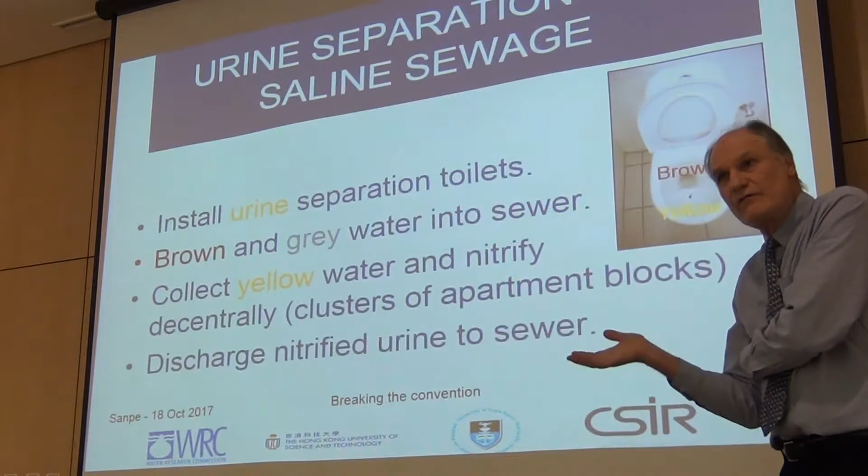Now we have nitrate and sulfate in the sewer, and the bugs will always choose the nitrate first and leave the sulfate alone because they can get more energy using the nitrate than the sulfate as an electron acceptor. So the water, while it's going down to the sewage treatment plant, will get nitrogen removal done to it, and it will preserve the sulfate for the biological sulfate reduction SANI system that I was planning.

So there are some projects now, and sewer modeling is becoming a high visibility project with all the biofilms and all these good things that grow in the sewers to try and work out how much nitrogen removal can we get on the way to the sewage treatment plant. And now we don't have nitrogen to remove there anymore, just phosphorus and organics. And that will make the sewage treatment plant a totally different kind of concept than we have today. A much smaller footprint, both on consumption of power and on occupation of land. That's why I call this talk breaking the convention.

Now, the problem is, you cannot change to this kind of treatment system piecemeal. You've got to do it all in one. Okay? And that's where we get stuck, because we find it hard to take the risk and say, okay, let's embrace this and go forward.

Alright, so basically this is what I've just said. The nitrate decreases the sulfate reduction, so we don't get crown corrosion in the sewer. The sewer begins to act as our biological denitrification reactor, and it minimizes the crown corrosion. We treat the brown and the grey water in the SANI process, like the one that I described, and the SANI process is a nitrification denite packed bed reactor that removes the N and so on.

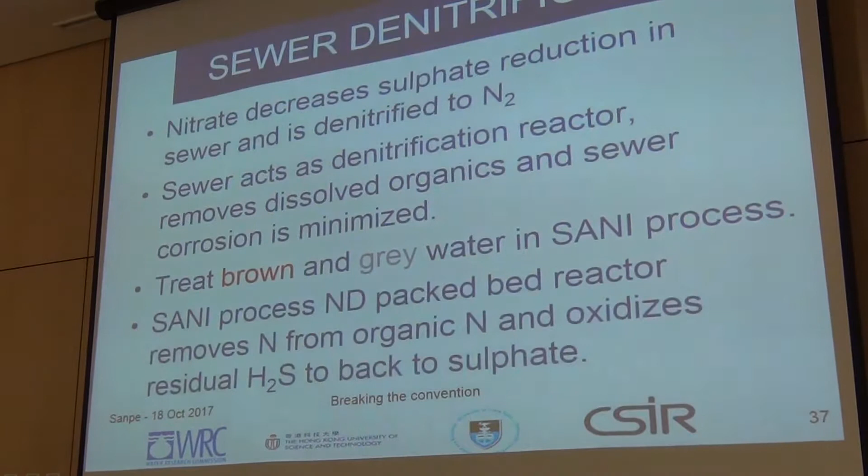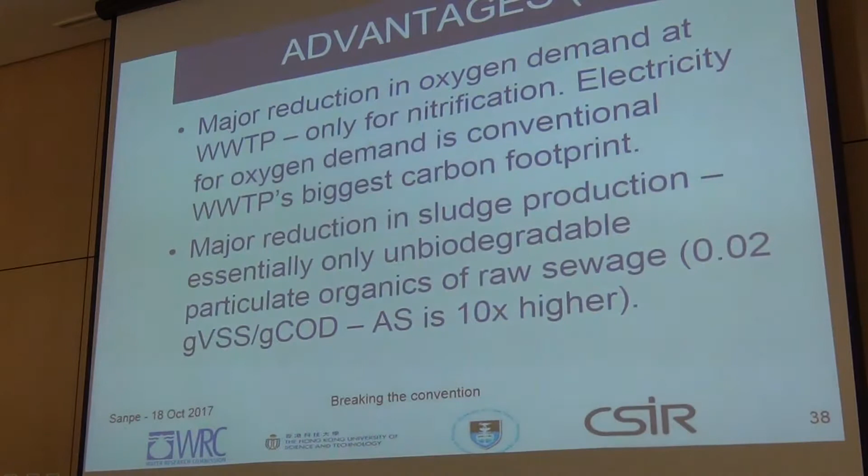In fact, 80% of Hong Kong's sewage is just primary treatment on Stonecutters Island, but they are under pressure to reduce the dissolved organic, because chemical precipitation treating of wastewater doesn't remove the dissolved organics and doesn't do anything to the ammonia. So if they couple this idea of decentral urine separation, then they can do the nitrogen removal and remove the dissolved organics on the way to the sewage treatment plant, and then chemical precipitation will already give them a very high quality effluent that they can discharge to sea, or even reclaim and redistribute. Right. So, yes? I'm just trying to figure out, you're saying they could reclaim it, but surely it's softened.

Now you can do your desalination at the end of the pipe, because you've now diluted the water to 1/3 of seawater, which means your concentration gradient across the membrane is much smaller, which means the energy consumption is much smaller, and now it's worth the cost to reclaim the water and put it back into the system. We can let saline water into the sea if we don't want to reclaim it, that's not a problem. But now it becomes worth going to the expense of doing desalination, because now we can put it back into the system. But it won't be as expensive as desalinating at the top end.

Alright, so there's a major reduction in oxygen demand at the wastewater treatment plant. Major reduction in sludge production, essentially only the unbiodegradable organics, because the processes that we use are autotrophic and not heterotrophic. So the bugs produce much less sludge. We have major water saving, because we now use seawater toilet flushing, and we've repaired the old broken leaky pipes. However, it applies to coastal systems only.

But then we started thinking, maybe, what about this acid mine drainage? That is a water resource. The difficulty there is the acid mine drainage is not like seawater, in that it has chemicals in it that are potentially dangerous to human health. Those would have to be first removed before you can distribute the partly treated acid mine drainage as a water resource for distribution and toilet flushing. But it's not impossible. And under those circumstances, of course, a wastewater treatment plant doesn't become this bothersome, smelly thing at the end of a pipe.

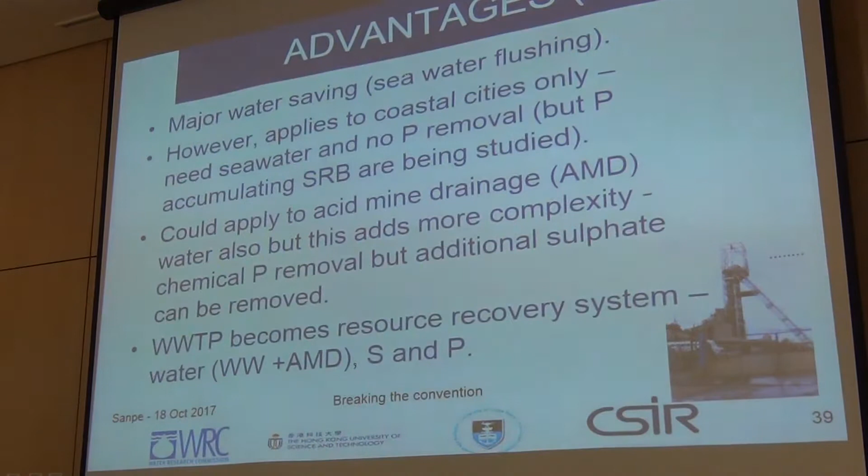It now becomes an industrial, chemical process where we are recovering resources, like nitrogen and phosphorus and all those good things. Removing phosphorus by chemical precipitation, and then doing desalination so that we don't increase the salination problem. So we need to re-engineer the whole scheme of the way we're doing it. But the water can be done that way.

eMalahleni is one place where acid mine drainage is treated to potable water standard. eMalahleni, what used to be Witbank. And they do that because we're a little bit stuck, because water is owned by the state. So if a person takes the acid mine drainage, treats it to put it into the river, that person will want to be compensated for the cost of doing that. And then who's going to pay for it? And that's where the stumbling block is.

Here, they treat acid mine drainage to potable water, and then the municipality buys it. So the company that treats the water is getting compensated for it. It's better to do desalination on treated, less saline water than on new seawater. And the Gulf states' experience validates that claim.

Why? Because in the Gulf states, they take the first pass, desalinate, put it into their distribution system. It goes to sewage treatment plants, they inject it into the ground, and a few kilometers further down they pump it back out again and call it new water and desalinate and treat and do whatever they need to do to put it into the system a second pass. They do that rather than take water straight from the sea every time, a one-pass system. They don't have a one-pass system.

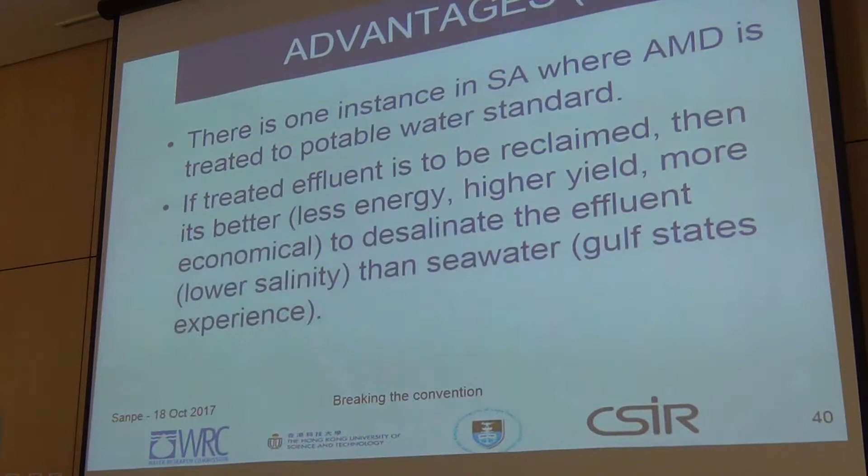All right, some conclusions. From a sustainability perspective, of course, conservation of surface water quality and quantity is a far greater priority than any energy or carbon reduction that we might achieve in wastewater treatment. That is why I'm saying tweaking and fiddling around with the existing system is not going to unlock the kind of step change that we need in order to consume less water within our cities.

While energy reduction at a wastewater treatment plant is good, it should never be at the expense of the water quality itself. Seawater distribution in a dual distribution system realizes freshwater saving with less energy consumption, carbon production, and nitrous oxide, which has a persistence effect in the atmosphere of 300 times CO2. Methane is 22.

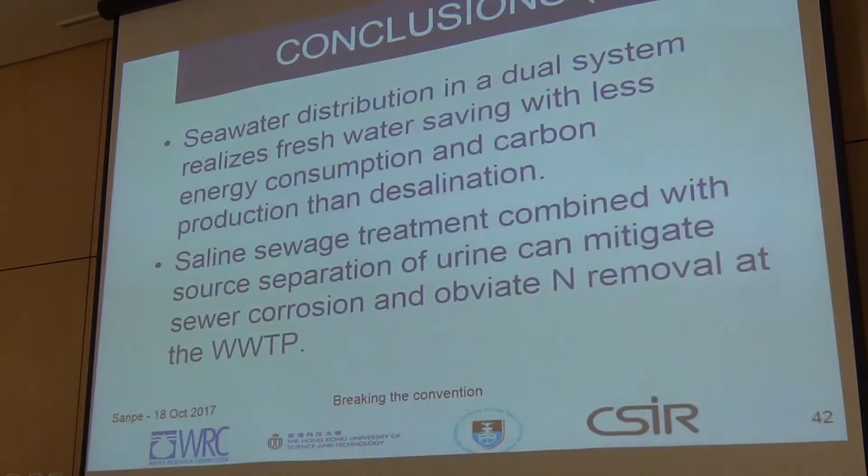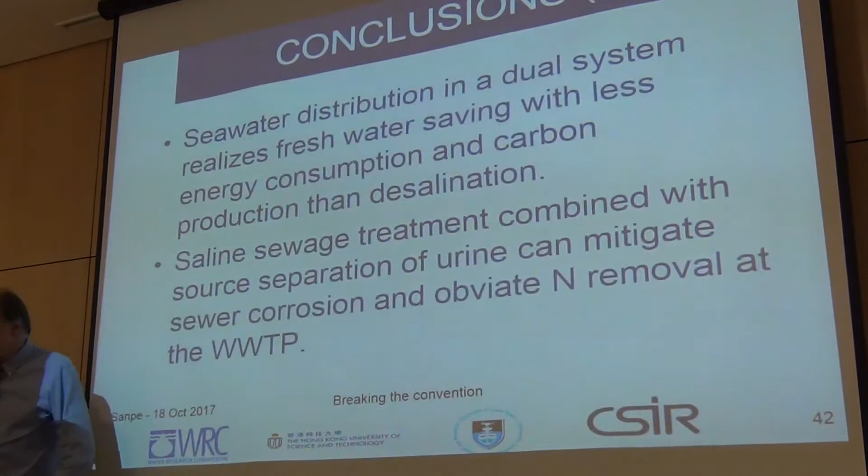Saline sewage treatment combined with source separation of urine can mitigate crown corrosion and obviate nitrogen removal at the sewage treatment plant. Modeling biological sulfate reduction is progressing well, both at UCT and at Hong Kong University of Science and Technology.

Applying saline sewage treatment and urine separation, which is dual distribution and collection, requires a major rethink of urban water cycle design and management. It becomes more complex, but we need to embrace complexity if we want to have a smaller footprint in our resource-hungry cities.

The co-workers are Dr. Jacques Wilsenach. He was the project leader of the Water Research Commission. He did his PhD at TU Delft and was formerly at the CSIR. He is now at Virtual Consulting. Professor G.H. Chen is the leader of the research group at Hong Kong University of Science and Technology. And Professor Mark van Loosdrecht, he's at the Technical University of Delft, where they also do a lot of work on sulfur cycle systems and so on.

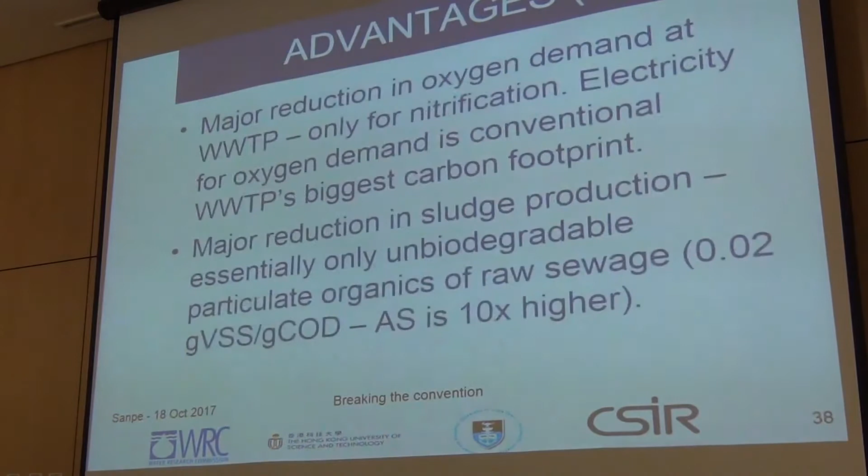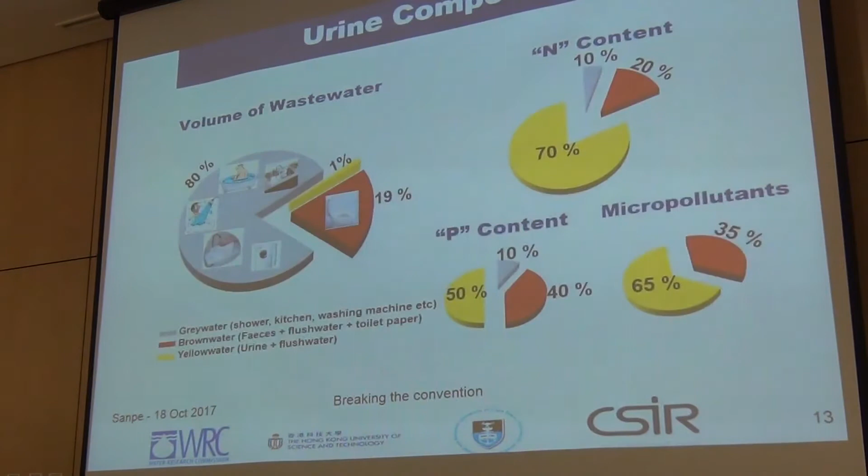So, Peter, have a question then? Let's go back to that slide with the composition of the yellow, brown, and grey water. There you go. This one, Peter. Yes. If so much of the phosphates is in the urine, half of it's in the urine, do we have an overemphasis on removing phosphates from detergents then? Because of this whole drive about phosphate-free detergents.

In 1985, the Water Research Commission did quite a far-reaching evaluation on whether South Africa should introduce legislation to stop phosphate builders in detergents. They decided not to influence the market too much, and that the soap cookers would impose their own limitations through competition, and that is in fact what's happened, because more and more of these detergents don't have phosphate as a builder any longer. So while we've not had legislation, we have seen decreases in the phosphorus content of our municipal wastewaters.

They're putting in alternatives like zeolites or calcites. They're a bit reluctant to do it because all alternative detergent builders than phosphate have a higher wear in the washing process. So your clothes don't last as long. You don't wear them out, you wash them out.